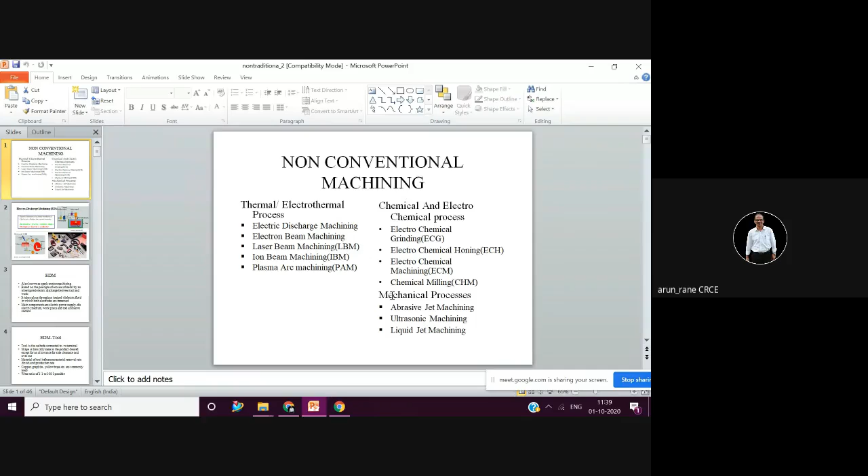But if you want to expedite, that is if you want to make it fast, then you also make use of electric current. So in that case it becomes electrochemical. So your electrochemical grinding, that means use of electricity as well as chemical. So ECG, then electrochemical honing, electrochemical machining, chemical milling. So out of this only chemical milling comes under the category of chemical. EDM and wire EDM we are going to study in detail because the weightage for that is 10 marks.

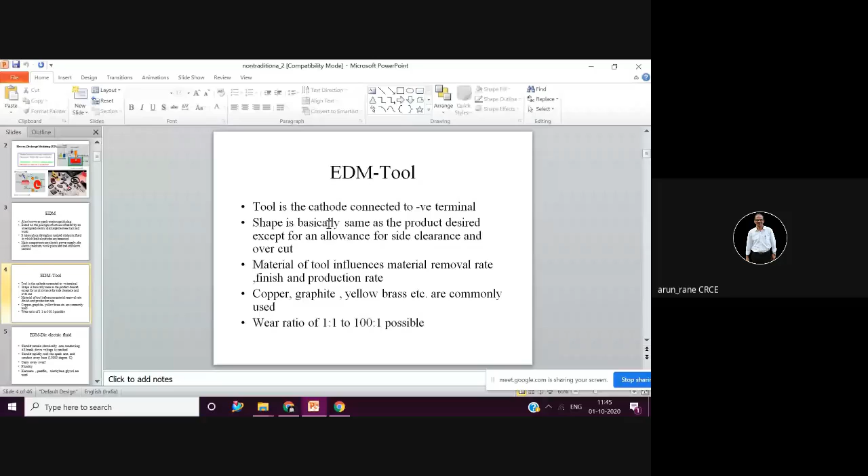So this we'll see later on. Now we'll go for laser cutting. Yesterday we discussed AJM, AWJM, EBM, and we were discussing about laser.

So laser, as I told, in the childhood we must have used a lens and converged the sun rays so that your paper burns, or if you converge the rays on the skin, your skin also burns. That's nothing but erosion. So the beauty of laser is that it doesn't get scattered. It travels in a straight line. The laser which is used for presentation, the light travels in a straight line. It doesn't get scattered. So energy is focused, and that's why it has medicinal applications.

Medicinal applications like cataract. Cataract is nothing but a generation of a fungus on the retina, and that's why you

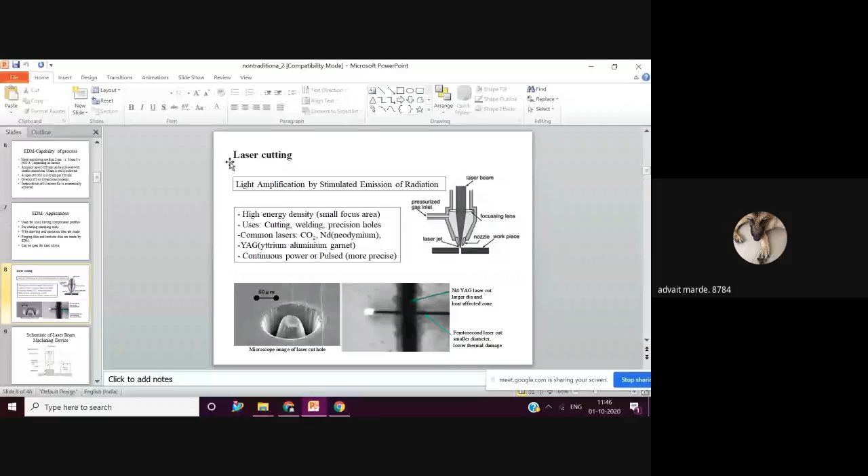So cataract is nothing but a slight fungus which is developed in the retina, and then you start looking blur. So what happens in laser cutting? You direct a laser. That is, you drill a small hole near the eye. So that is nothing but engineering only. You drill a small hole through which the laser is passed, and you have to drill one more small hole, where the cataract, which is nothing but the chips in our language, whatever is being melted or cut, is collected from the other side.

And this process is called phacoemulsification in medicine. It hardly takes 10 to 15 minutes. The patients are asked to wait for another 15 minutes, and he is ready to go home within half an hour after this operation. Same process for the kidney stone also. Kidney stone is because of bad habits, that is, you don't drink water. There is a formation of small stones in the urinary tract, and that obstructs the flow of urine, and the urine flow is very painful because of the stones.

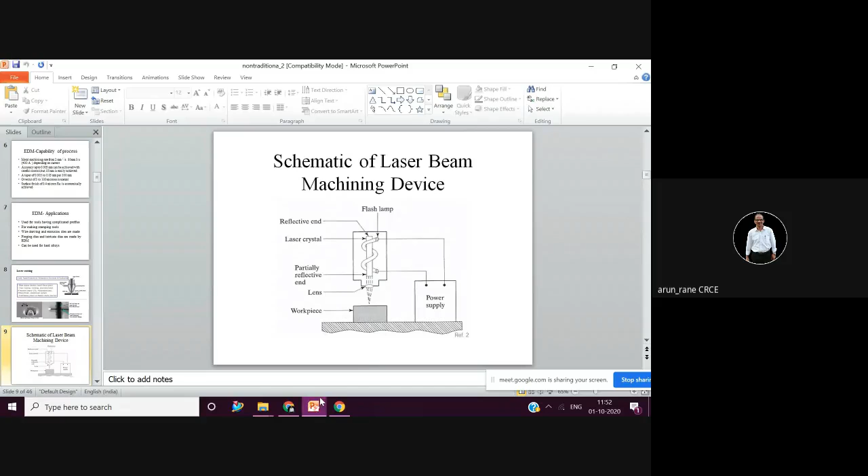So all of you know the principle. It stands for light emission. When a quantum of energy from a light source is made to fall on a medium like ruby, ruby is a crystal, its atoms absorb the radiation. So this has to reflect. This has to reflect in your answer.

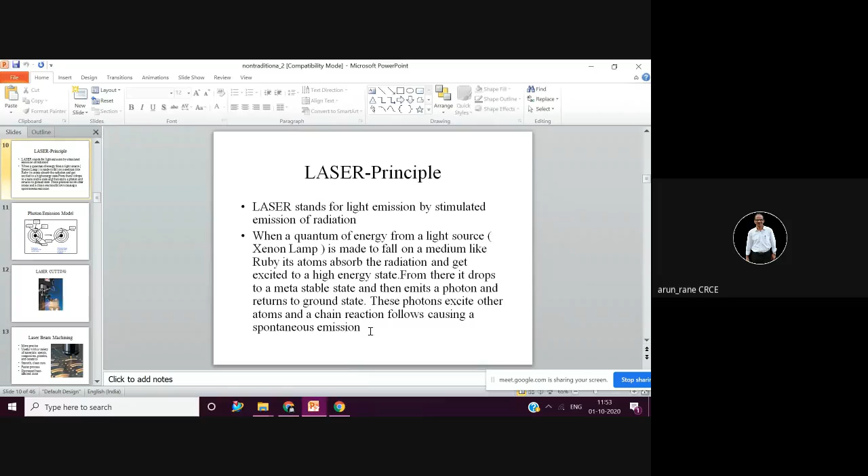This is the principle of laser. This is important. It emits a photon, right? And they excite other atoms, the secondary emissions, and then this chain reaction follows and it causes a spontaneous emission. This you need not draw because that's physics which is not expected. That is the photon emission model.

Because all of you know that this is the nucleus. In the nucleus you have protons, neutrons, and there are electrons orbiting in an ellipse, and you supply some energy. You excite the electrons, and if some electrons are in the excited state, they no more remain in the orbits, whether it is 1s, 1s2, 2s2, p, f. Once it is excited, it no more remains stable, it becomes unstable.

And what if the electron is in an unstable state? Then it has to fall somewhere. Okay, so it jumps from one orbit to another orbit, right? And in this jumping, there is a conversion of energy, as per the law of conservation of energy. So we get a light when it's excited, and that light particle is nothing but the photons.

There are many electrons which are becoming unstable, which get excited and move from the ground state to the excited state. And during this, when they fall down, you get a light.

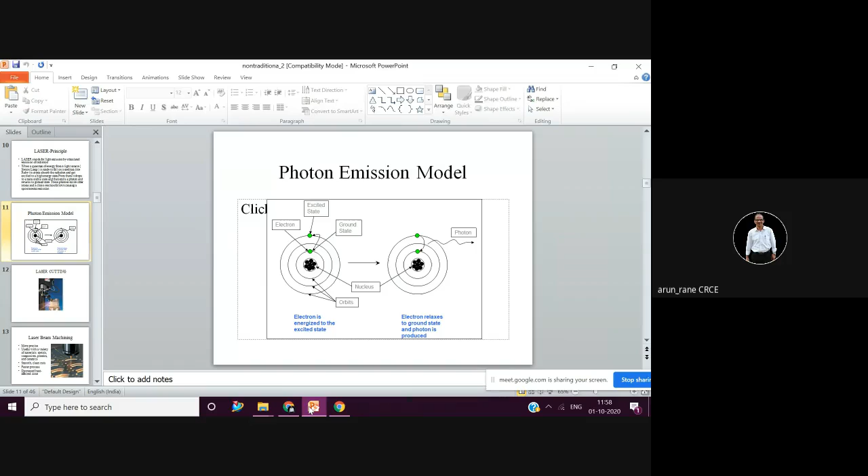So this is our semiconductor physics, photon emission. During the jumping, when the electron jumps from one orbit to another orbit, the photons are generated, and that is what we call the laser effect.

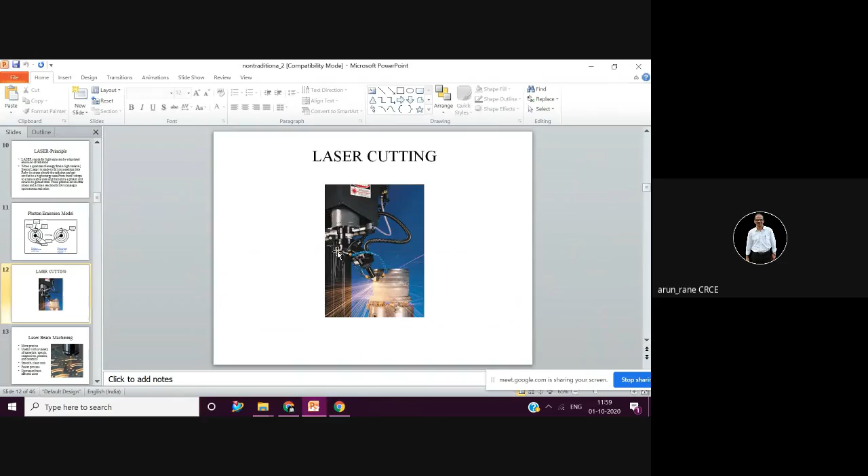So for laser cutting machines, you have tabletop models which are used for engraving, as well as huge machines which are used for cutting. So they are available depending upon your requirement. This is a medium size laser cutting machine. The cost of laser cutting machines starts from 2 lakhs and goes till 7 lakhs. This is the application of laser beam machining.

Now here we are cutting an elliptical slot. Remember, it is very fast, and laser beam machining can be used for hard material machining. And not only hard materials, it can be used for composites, plastics and ceramics. You know very well how hard ceramics are. You get a totally burr free component, and that is the biggest advantage. So it eliminates the deburring operation, which is a secondary operation, and that is what is called a clean cut.

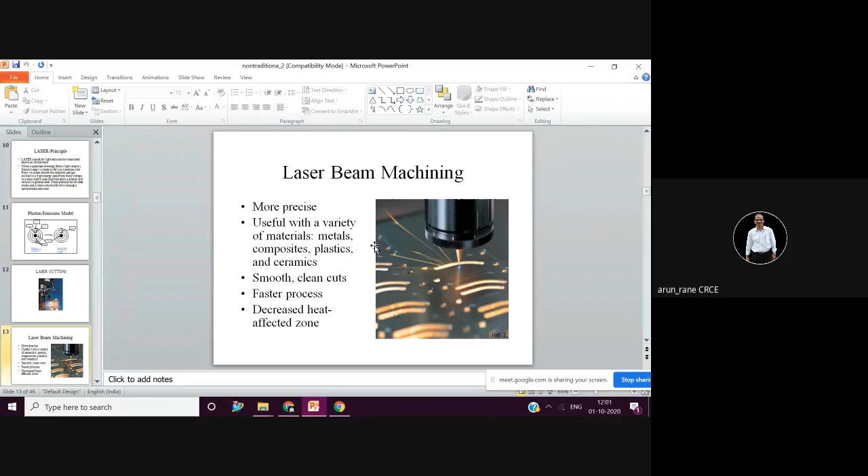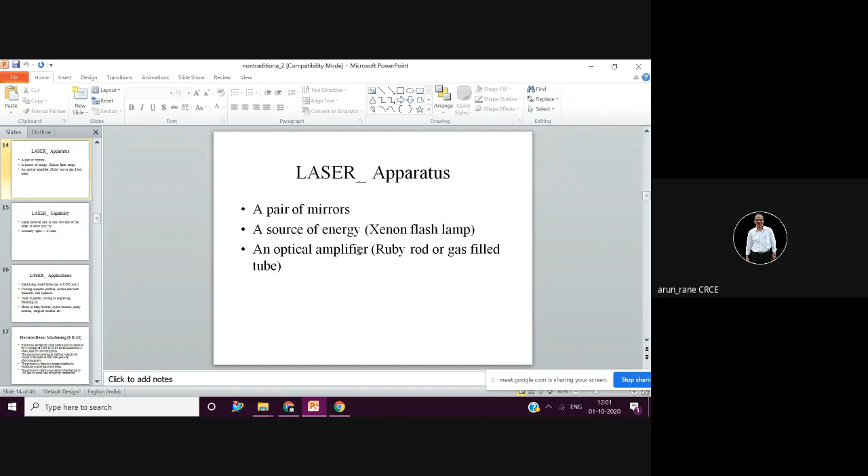So it is time consuming. So any process which gives a burr free component is always welcomed. So with LBM, the advantage is you get a burr free component. Then the laser apparatus basically has a mirror. Any mirror will have its specific focal length, so that will decide its range, the area it will work on. Then a source of energy, then an optical amplifier, that is a ruby rod or a gas filled tube.

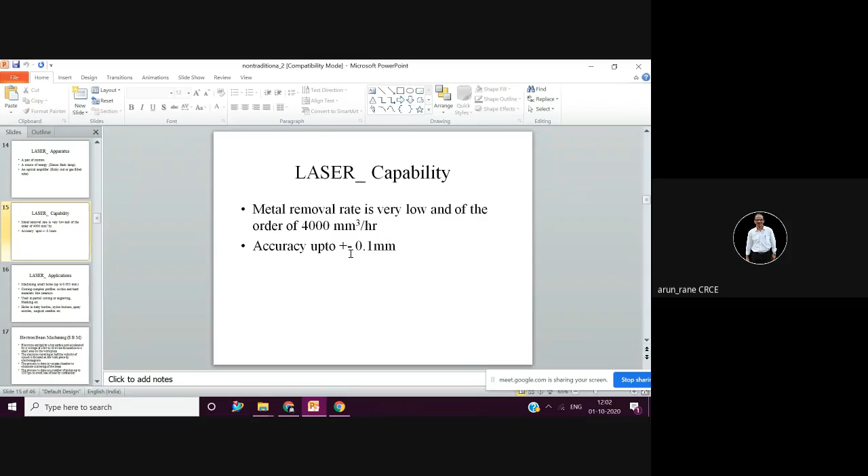Laser accuracy is not that good. That is the disadvantage. Laser accuracy is not that good. It's plus minus 0.1. So if you're talking about 20 micron, this is 100 micron. Plus minus 0.1 mm, it's 100 micron. That is, you multiply by 1000. So if you want 0.02, laser fails.

Laser fails. But it can be used for the small holes, right up to 5 microns. It depends upon the source, what kind of source you are using. And as I said, it can be used for any material, for the bottles, baby bottles, nylon buttons, spray nozzles, surgical needles. It can be used for cutting, it can be used for engraving. The operations are very wide.

And engraving, it is very fast. In laser, engraving is very fast. Hardly takes seconds, 2 seconds or 3 seconds. Of course, it depends upon what text is to be engraved. But generally this laser engraving, any engraving, will not take more than 10 seconds.

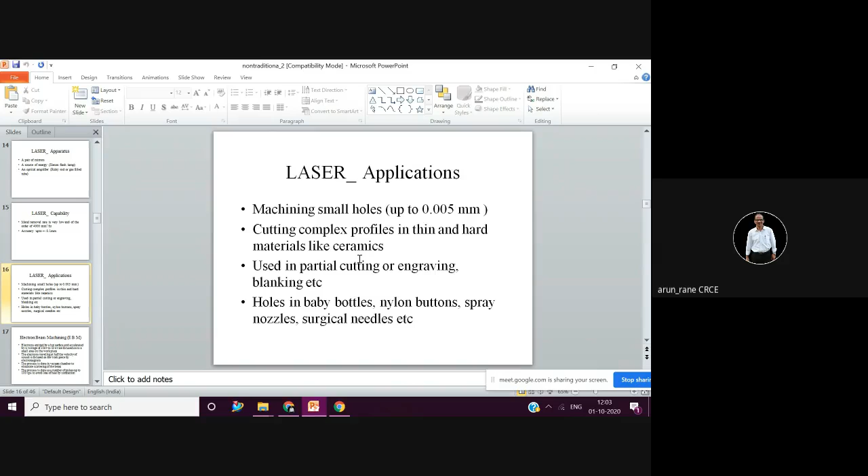Then we have already discussed electron beam machining, but I just want to show you because here there are some easy sketches which will be useful for you, because mostly I'll be sharing this presentation, because this is important from your examination point of view.

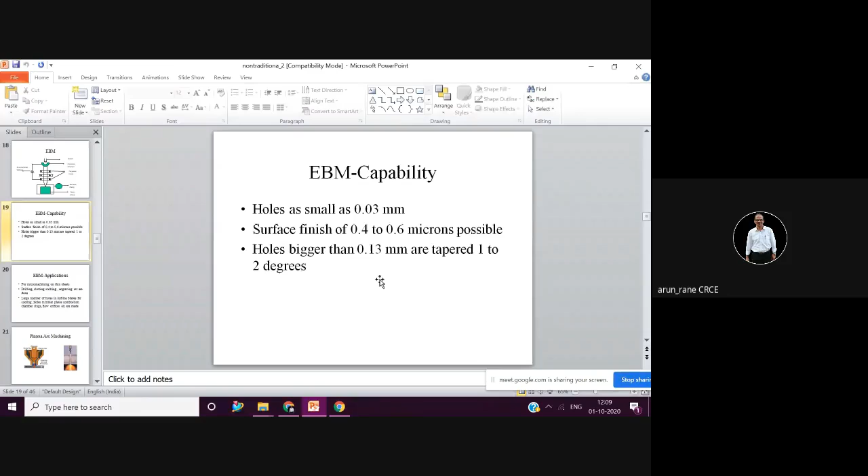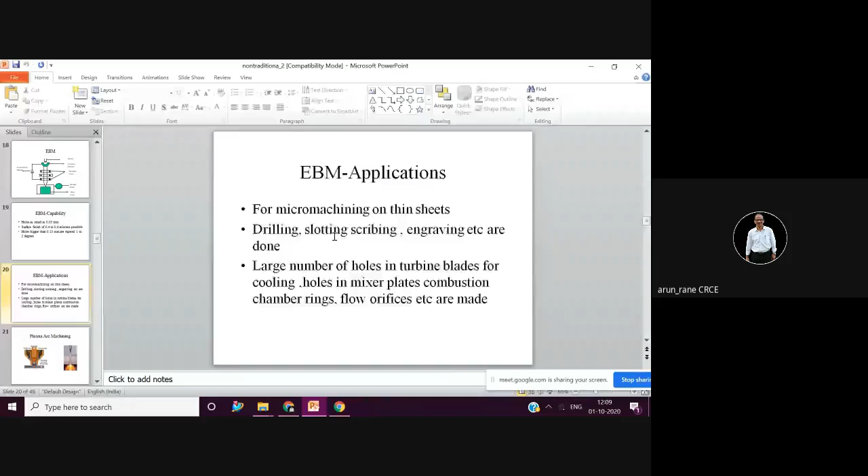Then you have plasma arc machining. Plasma again is the fourth state of matter. See, everywhere the principle remains the same. It's like your CNC milling machine, whether you talk about electron beam machining, laser beam machining, or abrasive jet machining. The setup is more or less the same. It looks like your CNC milling only.

Only in CNC milling there is a milling cutter, an end mill, and here the cutting tool goes on changing. In EBM you have electrons, in LBM you have laser, in AJM you have abrasive jet, in plasma machining you have plasma. And then depending upon the characteristics of this cutting source, you have to design your machine tool. That's all.

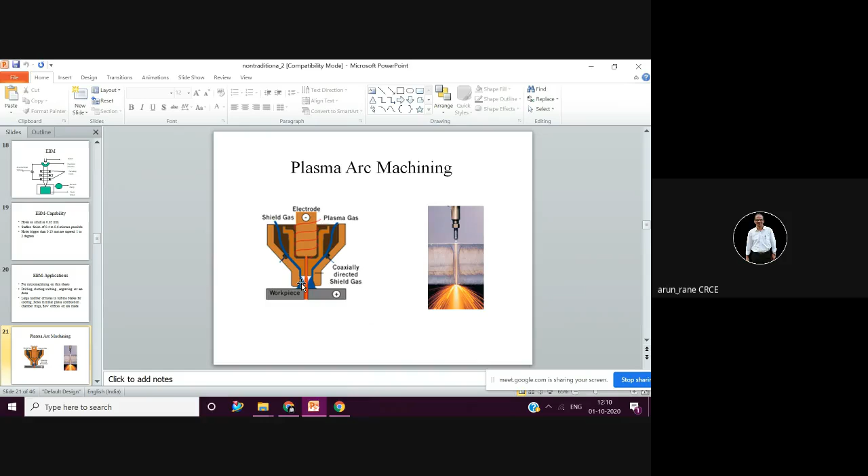So here now you have a plasma gas which is passed and which is used for eroding the workpiece. So gases such as argon are ionized by passing an arc across the gas flow. Then dissociated gases produce temperatures so high, 16,500 degrees Celsius, not Fahrenheit, Celsius, which vaporizes the work.

So initially you have to strike the arc across the tungsten cathode. Why are you using tungsten? Because it has to withstand such a high temperature. Water cooled copper nozzle. So you have two electrodes, that is cathode and anode. Cathode is negative, that is tungsten. Anode is positive, that is connected to the copper.

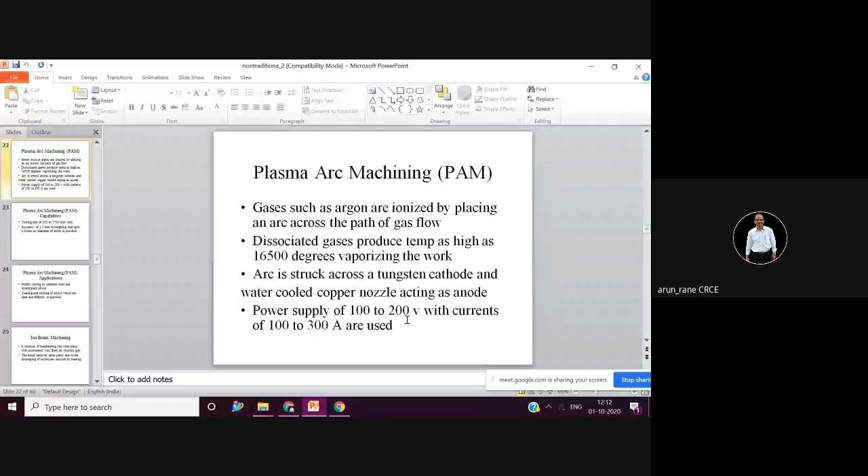Power supply is 100 to 200 volts and the current is more, that is 100 to 300 amperes is used. You have comparatively higher material removal rates, that is 250 to 1700. So feed rates are very high. You can cut at these feed rates. Again, accuracy is a question mark in plasma arc machining. You don't get good accuracy. Basically, it's rough.

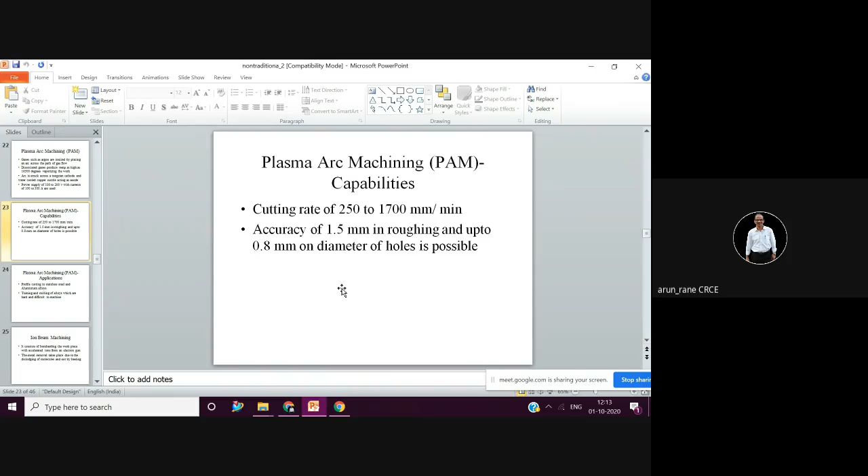The only advantage is your material removal rate is good and it can cut harder material. So generally it is used for roughing work like profile cutting in stainless steel. Like you must have seen gas cutting in the workshop. You do gas cutting with the help of a torch, an oxyacetylene torch. So that is called oxyacetylene gas cutting. So here, instead of oxyacetylene gas cutting, you can use plasma.

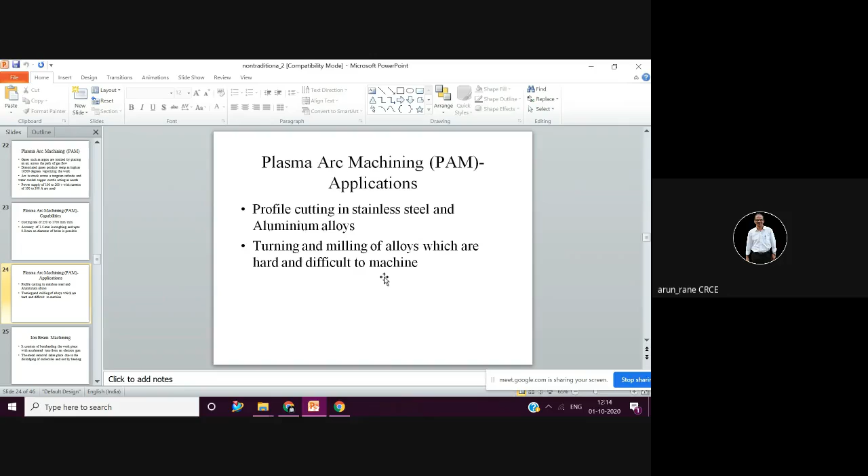So you can describe, you can draw the sketch. Plasma arc machining is not that important from the examination point of view. But what I was telling is that abrasive jet machining is important. Abrasive water jet machining also you can write. Electron beam machining you can write, where electrons are used. Laser beam machining is important for the examination. So that is the fourth one. Then the fifth one we saw, that is plasma arc machining.

And now the sixth one is ion beam machining. So here the cutting is done with the help of accelerated ions. Like your electron beam machining, there is kinetic energy. So these accelerated ions are bombarded toward the workpiece, and then metal removal takes place because of the dislodging of the molecules. And remember, there is no heating here. The molecules are removed, one molecule, two molecules. So like that, if you remove millions of molecules, you can say that the material is cut or eroded.

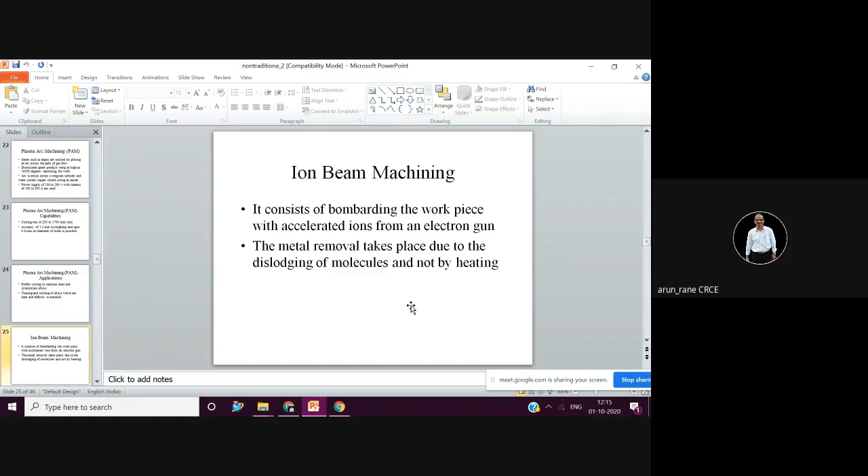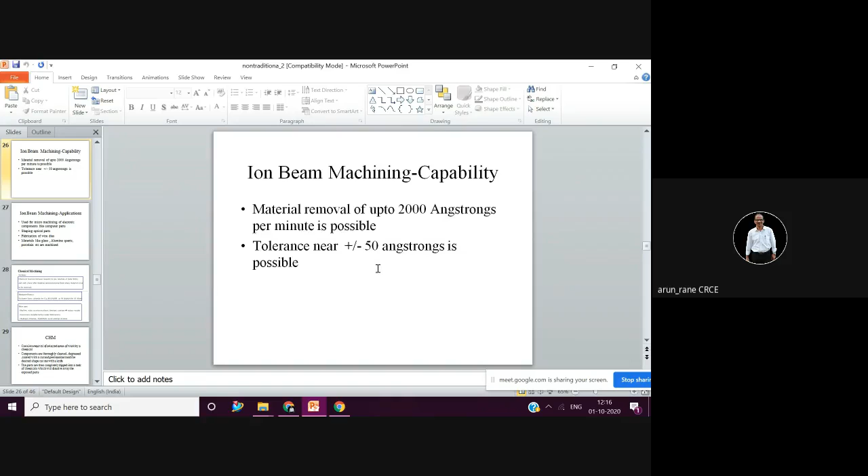Again, the material removal rate is not that good here in ion beam machining. Ion beam machining is not important from the examination point of view. So it can be used like your milling or micro machining of electronic components like computer parts. It can cut materials like glass, alumina, quartz, porcelain, which are very hard.

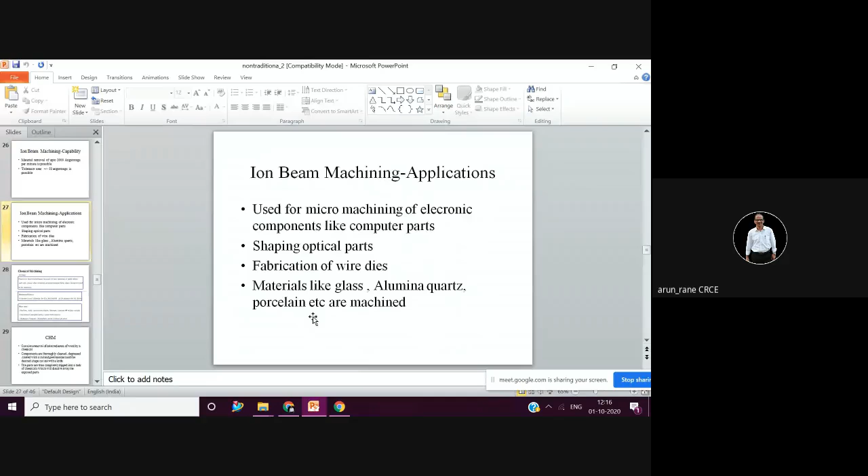So you can very well skip ion beam machining. I think it is not there in the syllabus also, but just that you should be aware that there is something called ion beam machining also.

See, there are many unconventional machining processes. Based on the principle of magnets itself, there are unconventional processes: magnetorheological, magnetomotive, electromagnetic, four based on only magnets, but those are all not practical. So that's why they are not popular. Of course, every process has its own unique advantages. The processes are useful in research work or very high tech or precision industries like space industries,

BARC, TIFR, those. Now, chemical machining is nothing but you are removing the material with the help of the chemical. So there is a chemical reaction which will take place between the chemical and the component. Now it is your skill, what to remove and what not to remove. So whatever you want to remove from the workpiece, you don't cover it, and whatever you don't want to remove, you cover it, and that is what is called masking. So in the masked areas, the material removal will not happen, and the material removal will take place only from the unmasked region.

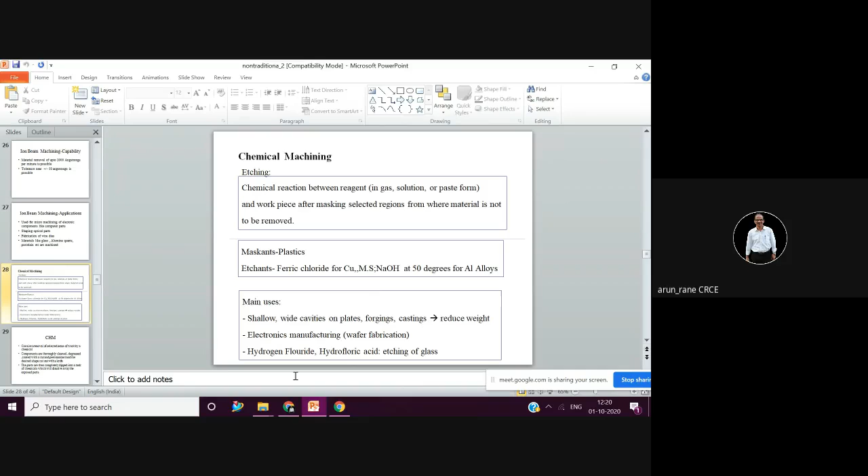Chemical machining is used for shallow wide cavities on the plates. Then electronics manufacturing, there are small wafers. Wafers means films. Then etching of glass with the help of acids. It is HF, that is hydrogen fluoride, hydrofluoric acid. So in chemical machining, selected material is removed by the chemical.

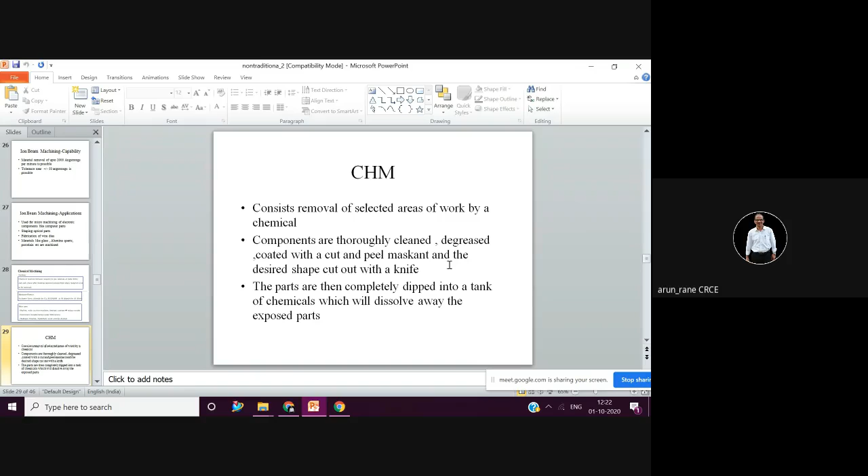How is it prepared? They are first thoroughly cleaned, then degreased, then coated, and maskant is applied, and then a shape is cut by dipping it into a tank of chemicals. And then that chemical will dissolve the part which is exposed. So here the material removal rate will depend upon how much time the workpiece is kept in the tank, and other factors like what kind of acid, what kind of maskants, what is the strength of the acid. So that all will determine the material removal rate.

You get a good accuracy of plus minus 50 microns. 0.05 is nothing but 50. You have to always multiply by 1000. So this is 5 by 100 into 1000, so that is 50. Surface finish is not that bad, but it is not that good also. Its minimum of 0.25 microns is actually not a good surface finish. We are talking about 0.1 or less than 0.1 Ra value, 0.05, 0.02. Material removal rate is slow or low. There is a limitation on how deep you can go.

Generally chemical machining is used for etching, and that's why it is also called chemical etching. So the depth of the marking, like suppose if you want to engrave your name like Sahil, or say CRC, if you want to chemically etch it, the depth cannot be more than 12.7, and it has to be more than 3.8. So it should be between 3.8 to 12.7.

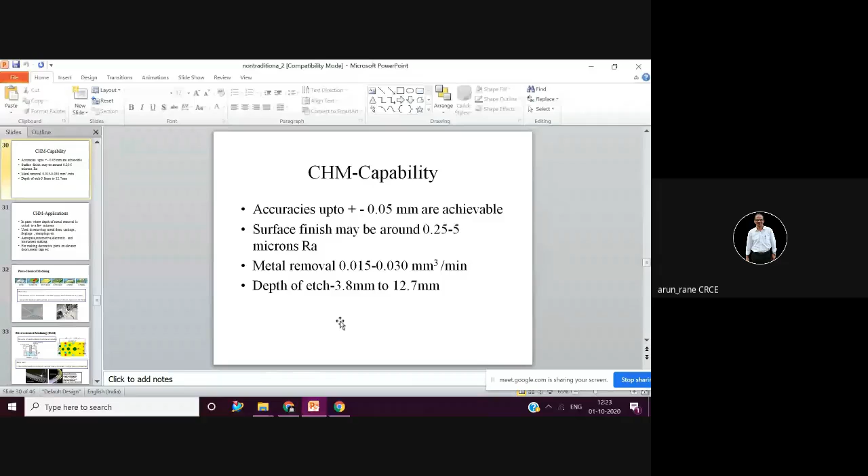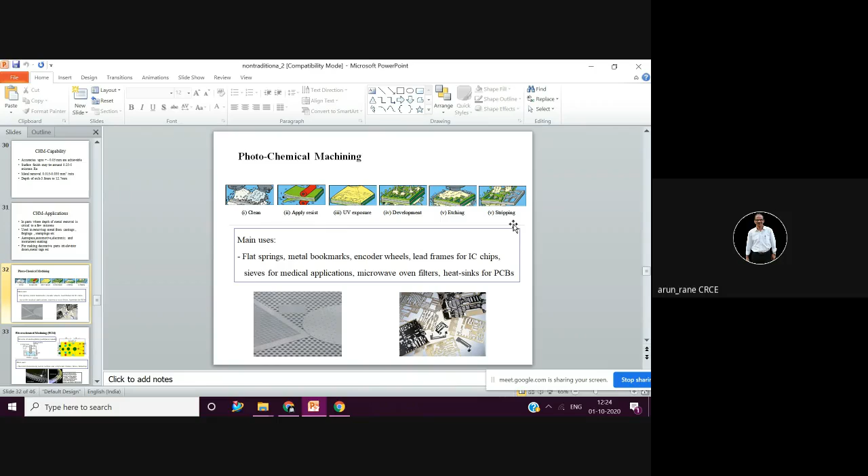Photochemical machining is also a part of chemical machining, and this is the flow diagram. That is, you have to clean, apply resist. In photochemical, you need to expose it to ultraviolet exposure. Then you have to develop it and then etch it. So the portion which is to be etched is exposed, and then you have to strip it. So this is what photochemical machining is, which is somewhat similar to your screen printing.

Then after chemical machining there is another process, important from the examination point of view. From the examination point of view, abrasive jet machining, abrasive water jet machining, then electron beam machining, laser beam machining. Photochemical is not. In electrochemical machining, the electric current is used. So it is exactly like gold plating. So in electroplating, we deposit the material in order to improve its characteristics.